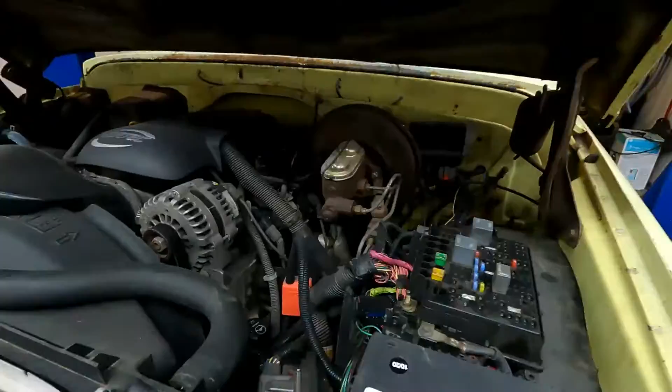Today we're talking LS swaps and what to do with all these wires. So stick around.

When we left off on the last video, I said we were going to start the wiring on it. So that's what we're going to get into today. There's a couple ways of doing it. On this pickup, this is Emily's shop truck, and we did this one the easy way. We had the original fuse box from it. So doing it this way, it was just a matter of connecting 3 wires, I believe, to it, and hooking it up to the battery and making sure all the grounds were there, and it fires right up and runs.

But most engines don't come with this. So, and this is extremely ugly. We're gonna fix this someday. But when we did this truck, we were in a big hurry, so it only took us maybe 2 or 3 hours to LS swap this baby. Yeah, so you can tell that we were in a little bit of a hurry.

Her radiator is zip tied, like she's mentioned before. That's fine, that's a complaint that I hear about commonly. You always carry a spare. Yeah, a spare zip ties.

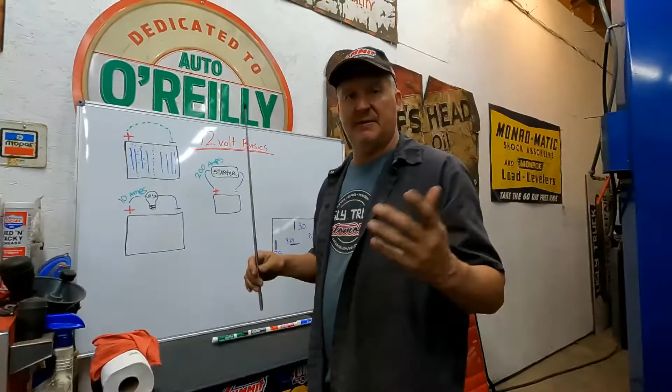So I'm going to bore you a little bit. I'm going to just go over a little bit of the 12-volt system that goes on in a regular car. Emily drew this so you could actually read it and see what each thing is. But this is a battery, okay? Say this is a battery. You got your positive side and you got your negative side on a battery. Well, that battery's got some plates inside of it that have half of it positive charged and the other half negatively charged, okay?

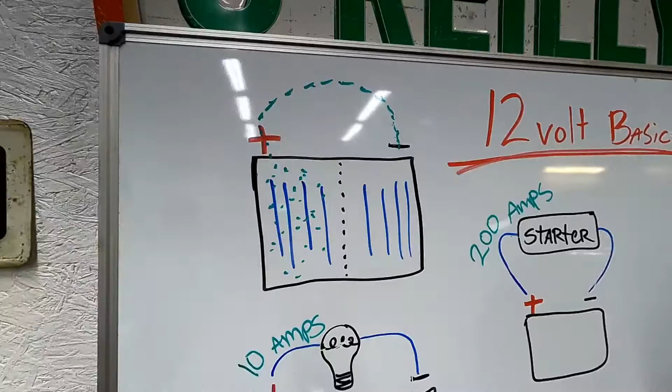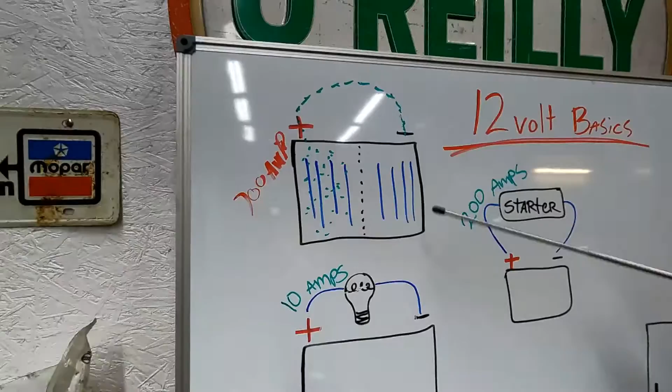Say this battery is capable of putting out 700 amps. So that's its max, okay, that it could do. So all the positive electrons that are on these plates, all those electrons want to do is get to negative. They're going to do everything they can possibly do to get to negative. So if I took a small wire and I went from positive to negative, it's going to do its best to pass 700 amps of power through that.

And an amp is just the same as like a garden hose. If you turn a garden hose on and you put your finger over the end of it, the pressure that's behind your finger, making it squirt out the way it does, that's the amperage of it. So if you had 700 amps, for instance, and it was a garden hose, you'd never be able to hold that with your finger. It's going to blast past your finger, no problem. That's what you're doing, so that's where the wire is not going to handle that.

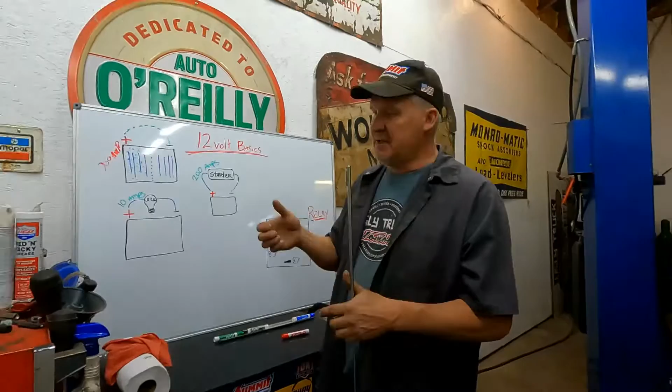It's going to melt, okay. So any kind of amperage that you're going to introduce to a wire, the wire has got to be able to handle that load, okay. So if you were going to do that mechanically, you know, you would have to have something that could really hold on to that pressure that water has got behind it. So that's amperage.

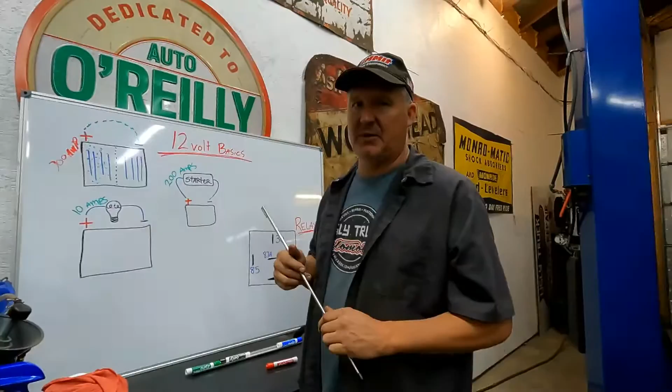It's just pressure, basically. It's not pressure, but if you think of it like that, that's what it is. And that's also current. If you talk about current, that's what I think of as current. It's current and amperage flowing. And that's all that the positive side of a battery is trying to do. It just wants to flow. So, for instance, a light bulb, okay, it has a filament in it that has resistance.

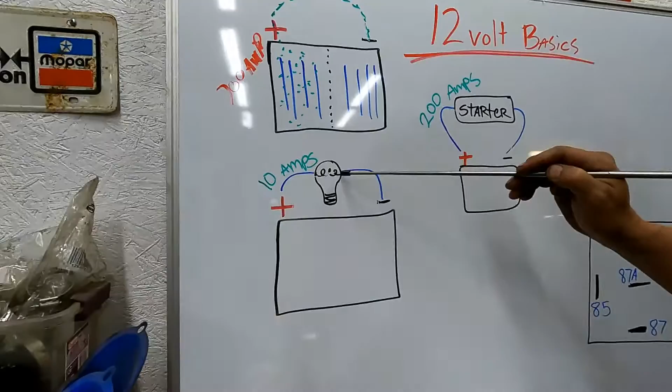So whatever kind of amperage it takes is going to pass through there, and as it passes through that filament, it's going to heat it up and it glows, and that's your light. But it's still just doing the best that it can to pass through that resistance that's in there and get to ground.

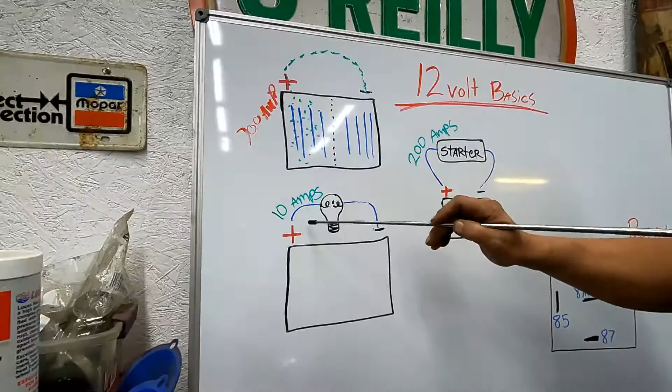So when you're talking about a current, nothing is done, nothing moves, until it actually gets to that. There has to be a path. It doesn't matter what interrupts that path. You can put a switch in it right there with an open. So a switch is going to be an open circuit, and there's going to be no current flowing until you get that to hit the ground, because that's all it wants to do.

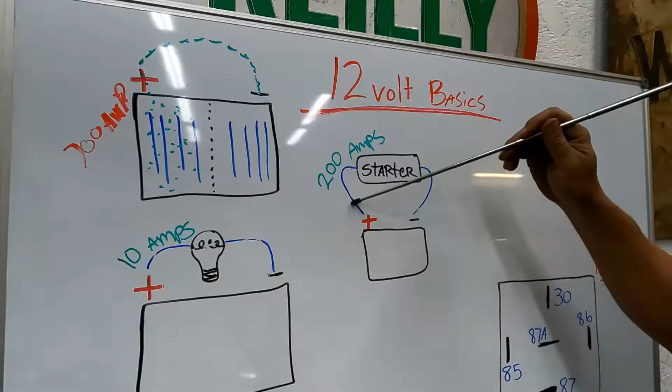So say for instance a starter. On this pickup, we would have like a number 2 or number 4 gauge wires that go down to the starter, because that thing's going to take 200 to 300 amps to start that motor. The starter solenoid doesn't, it might take 10 to 20 amps, and we're going to get into that. But you would notice that the wires that go down to the starter, they're nice and big wires, because they're carrying a giant load. If you ran this wire down to a starter and you went and hit the starter, this wire would burn and melt basically the minute you touched it, because it can't handle that kind of load.

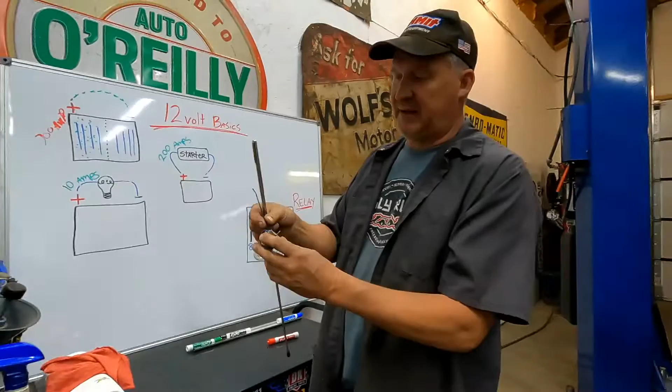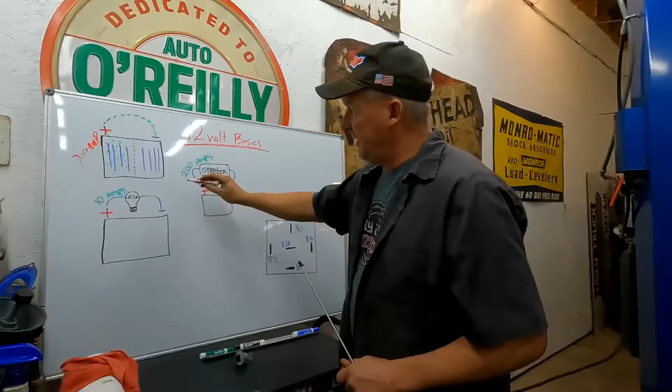So that's how a 12-volt system works. That's all you got to remember, is that the positive is trying to get to the negative. No matter how it has to get there, that's what it wants to do. So in all this is where relays come in.

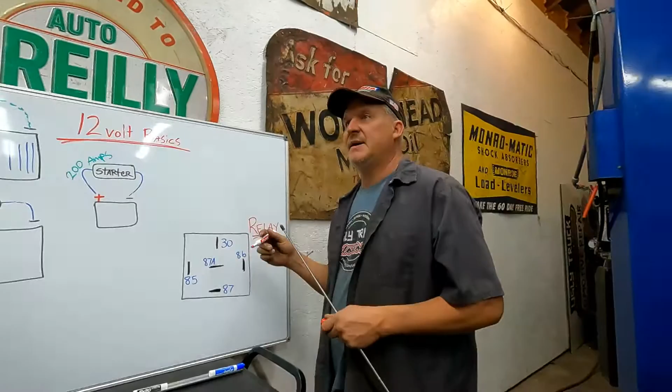Now, on this video we're talking about an LS swap. In 1985, this truck only had one relay in it, or two relays. It had a high blower relay and a horn relay, and those are two things that really took a lot of load. A long time ago, back in the 90s, they figured out that they could use relays to fire up some of these high amperage things, and you didn't have to have a giant ignition switch with giant wires going to it.

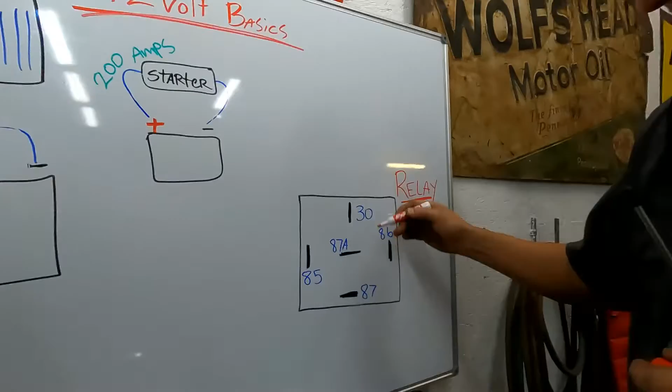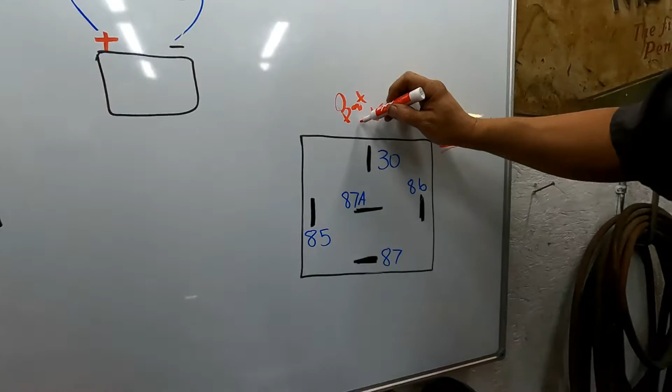Not a lot of amperage and wires coming into the actual vehicle, so they use a relay as a switch. So for instance, this relay, we'll do battery voltage here, battery plus. So you've got battery voltage going to terminal number 30, and this is going to have a nice, say a 12 volt or a 12 gauge wire going to it.

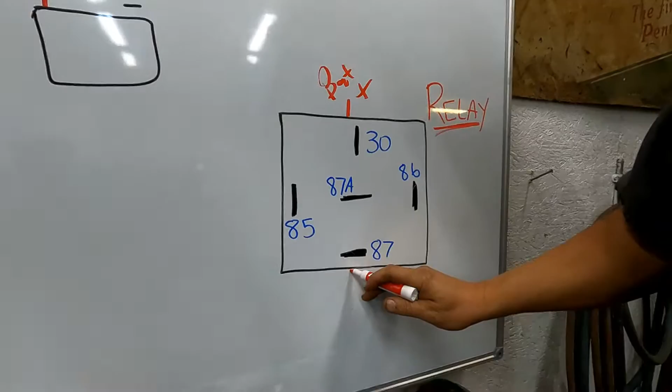Because what this is going to power up is going to be something that's got a pretty good load on it, like the starter solenoid. The starter solenoid takes a pretty good amount of amperage to fire that baby up. So let's say we're going to fire that starter solenoid up. Well, pin number 87 is going to be the one that goes to that.

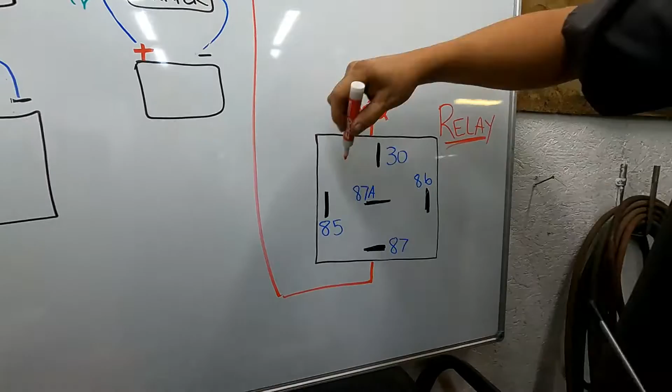So we've got a switch here. 87 and 30 right now, they're not connected, but in order to make these things connected, you've got pin 85 and 86. And if we put pin 86 to ground, and if we put battery voltage to this...

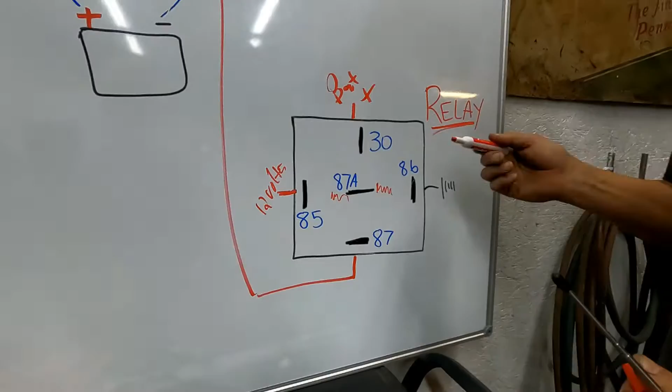It's going to send current through a little coil. So you're going to pass 12 volts through a little coil here, and it ends up making 30 and 87 contact each other. So there's your path, and it's going to engage that starter solenoid and make the starter crank over.

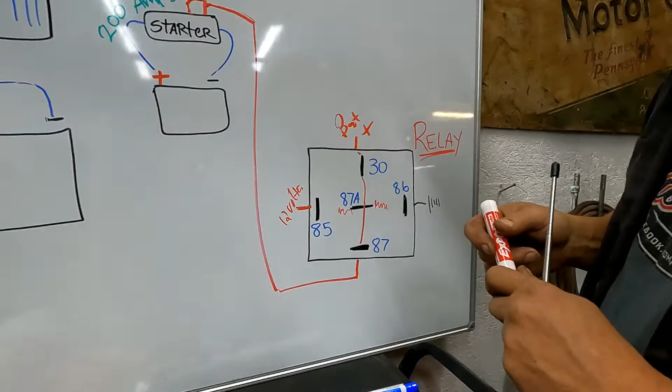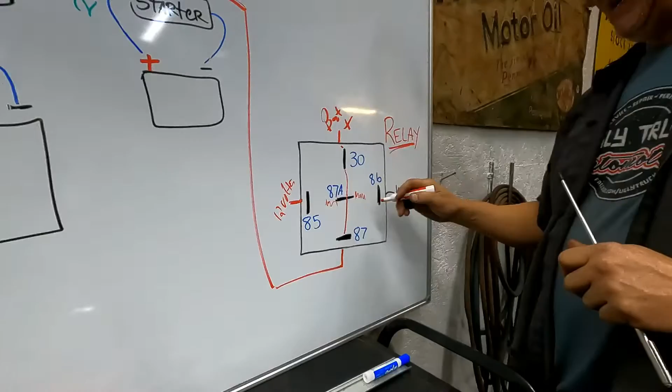The starter's already got a big giant battery cable going to it, so that's how it gets its 200 to 300 amp capable wires going to it, and a giant ground. The engine's a giant ground for it, but that's how a relay works.

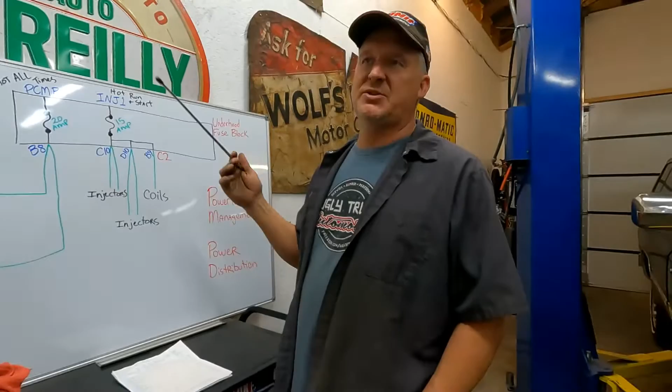Okay, so for this application, we've got a 2005 Suburban that we took the engine, computer, and all the wiring out of, and we're putting it in an 85 Chevy C10. Every one of these is going to be different unless you have the exact same instance. If it's a 2004, 2003, whatever, different engine size, it's going to be different.

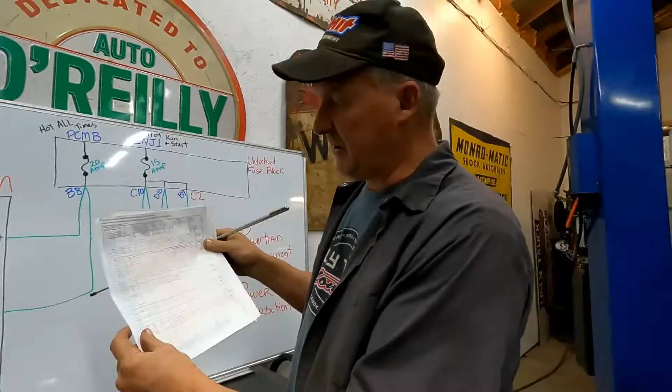So the thing you've got to do is learn how to read a wiring diagram. For this 2005 Suburban, you need to get a Powertrain Management wiring diagram. This is just the first page, and there are 5 other pages. We use ALLDATA, and on this wiring diagram, all the fuses are going to be along this top row.

We kind of did an example here, but you go across that top row and look at every fuse that's coming up, and you have to determine, hey, is this something I want to power up. Then go along each single one of them and decide, okay, I definitely need this fuse, and how is it turned on, and so forth.

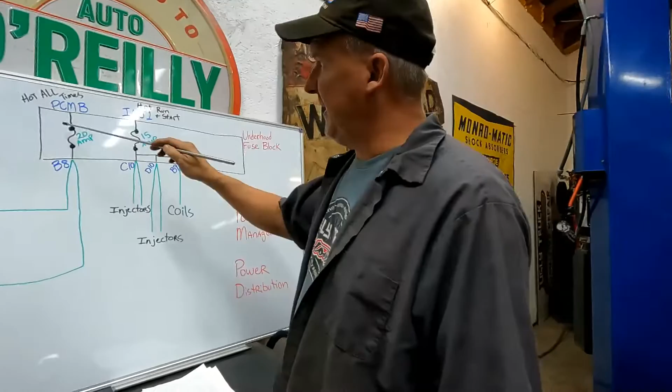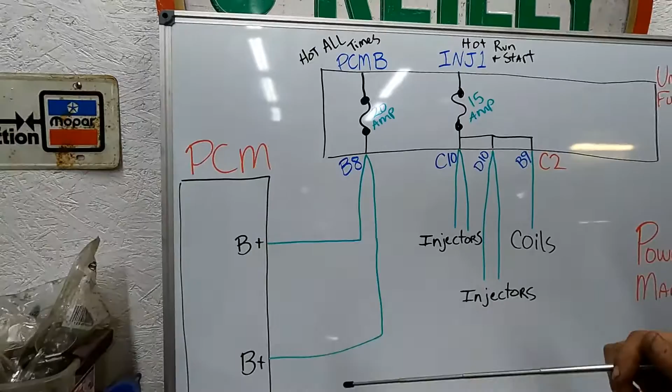So I look through each one and say, we'll work with this circuit first. I look at it and go, okay, we've got a 20 amp circuit here. It's the PCM fuse. It supplies battery voltage to the PCM all the time, whether your key's on, off, or anything. That truck has always got battery voltage going to the PCM, and that's the battery voltage that keeps it alive, keeps all the memory in it and everything.

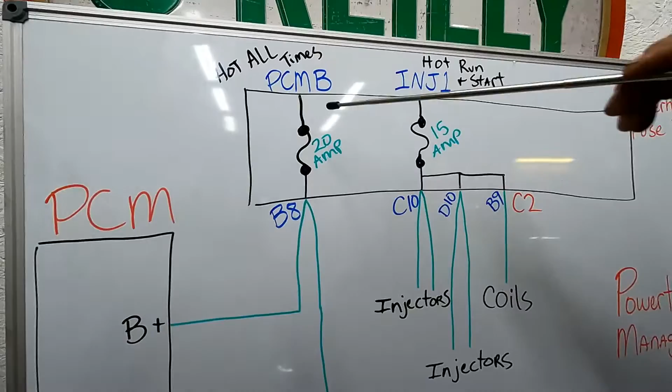So those are the 2 orange wires. They're green on our picture here, but in reality they're really 2 orange wires. When you turn that C2 connector over, it's literally only 2 orange wires, and they go to the same pin. So when I wire it up, it's going to have a 20 amp fuse going to it.

Okay, I got that done, I'm going to move on to my next one. I just knock them off the list. My next one over would be the injector 1 fuse. That injector 1 fuse takes a 15 amp fuse and it fires off 4 of the injectors, supplying power for them. It has 4 wires, and it also supplies power to 4 of the ignition coils.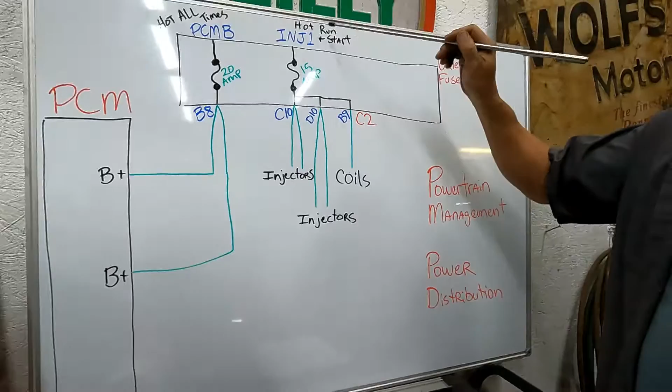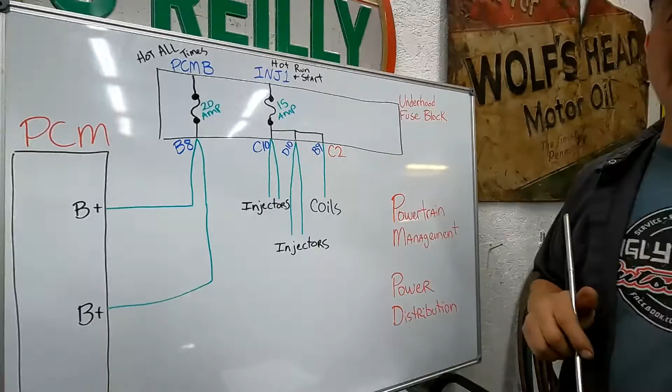And it's also going to turn on 6 other circuits. That's 1 circuit, and there are 6 more that have to be turned on to make that engine run. So that's how you do it. You start with that one, look at what it does, and that's what you have to supply power to.

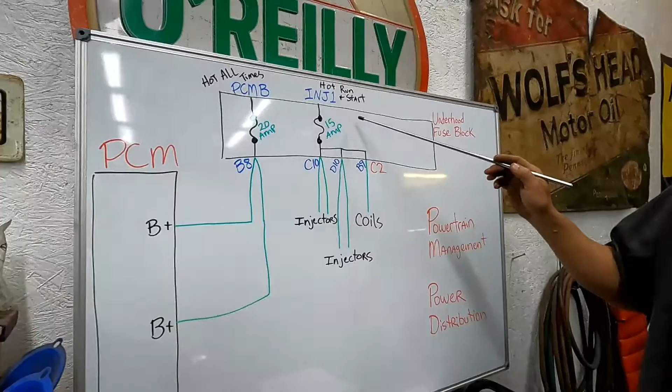So when we get into this and you see me wiring something up, wiring relays, that's what I'm doing—wiring up a relay to make this one go. And if you can see on this picture, there's 1, 2, 3, 4 more of them. So 5 circuits right there that are going to be powered up by a relay, each one powered up by that pink wire that comes out from the firewall. If you don't use a relay to do it, you're going to have big problems.

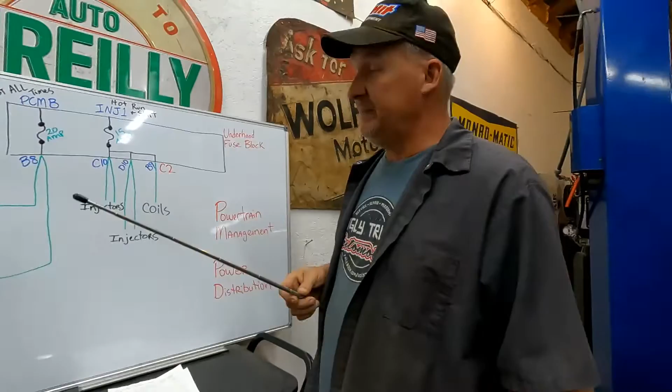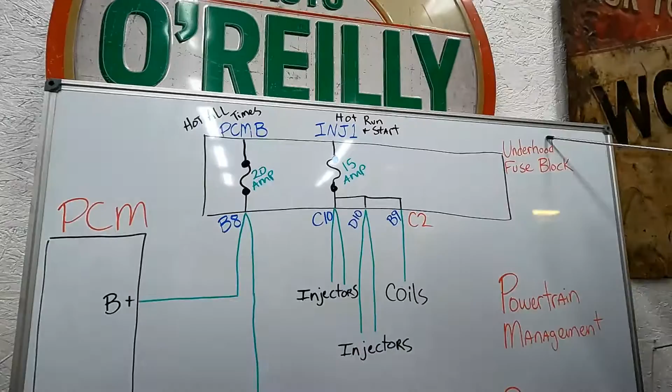I don't have the ability to run that many wires to one relay, so I'm going to use a few relays to do it. The Powertrain Management diagram just shows you your circuits that go to your PCM. You're also going to need to know your power distribution—how power gets to the PCM and all the other ones down the list, how the power gets to that.

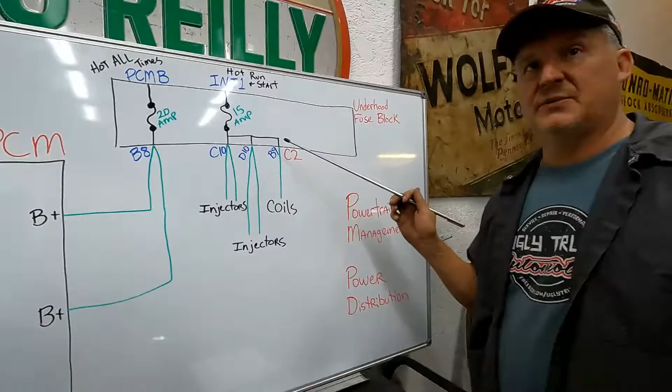So most of these, like the PCM one, goes through a 40 amp fuse right off the battery. And then the injector and all these other circuits have another 40 amp fuse that fires up all of those. And then your starter circuit, which we'll get into, has its own 40 amp fuse. So you'll have 3 40-amp fuses that'll run all the circuits in this wiring system.

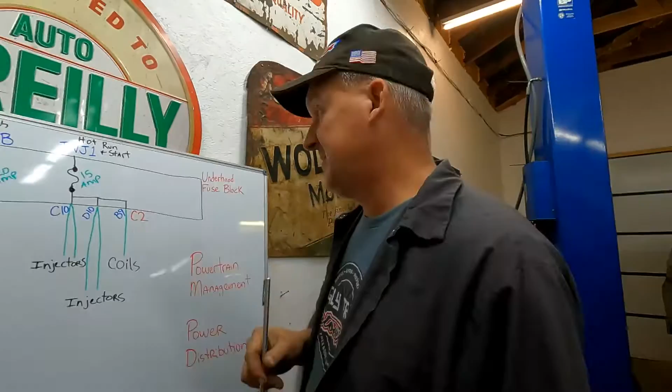So the great thing about the internet, aside from watching our YouTube videos, you can get a ton of information off of it. So you'll be able to get a wiring diagram off of this.

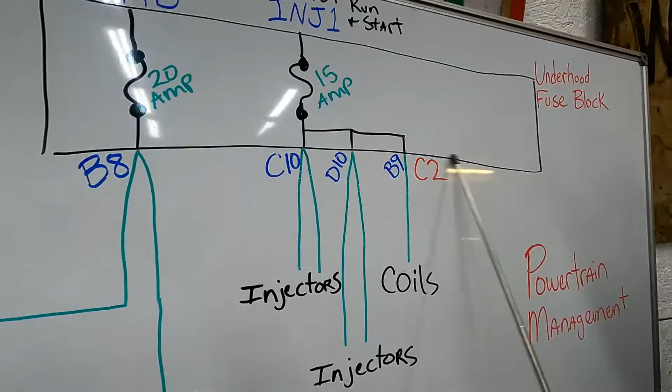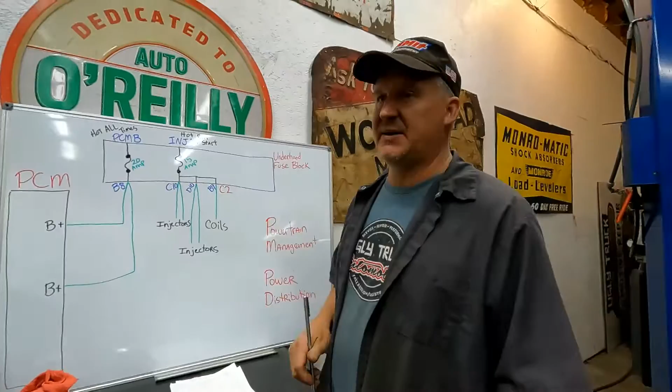It's also gonna tell you the wire, the pin number. So this one's B8, this one's C10, D10, B9. All of these are going to be pink. This one's orange. The rest of them, almost all the rest, are pink. But it's in connector number 2, which you can find out is a black connector that goes to it. But if you look at the wiring harness that you get from when it comes with the engine, there's only one wiring harness really that has a bunch of pink and orange wires in it. It's the biggest black connector that there is, and that connector supplies everything that LS engine needs. So, but it is connector 2.

When you get into wiring up other things, like we're gonna put cruise control on this truck and all the other stuff, then you have to start paying attention to what connector you're looking at. So, but just to make this truck run and drive, there's all your pin numbers, and that's your connector number, and a wiring diagram will show you that.

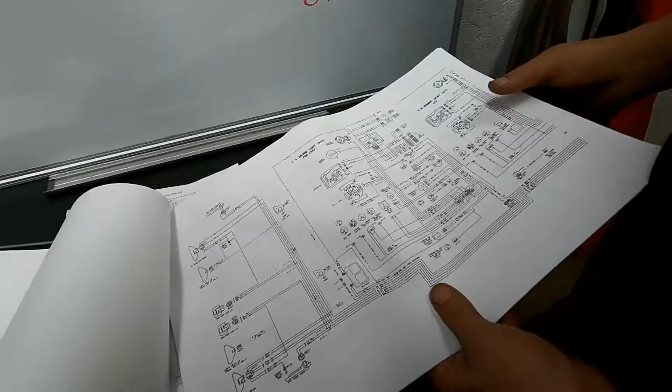Whatever you're working on, you could be putting an LS engine in anything, but like this one, we're doing an 85 Chevy. So do yourself a favor and buy yourself a wiring diagram for whatever you're working on, and they're cheap. This one was less than 15 bucks, and just by reading one, you'll learn a lot.

Sit there and just look it over and trace the wires, and that's how I learned how to read a wiring diagram. Nobody taught me how to do it. I was forced to do it. I had to figure out how to fix something, and I was forced into reading wiring diagrams. And if I can do it, you can certainly do it.

Believe me, I taught Emily how to do it. 30 minutes, and I mean, that's an accomplishment, right? It took a lot longer than 30 minutes. It was more than 30 minutes? Yeah, I think we're at like 6 years now. And I still don't get it. Okay.

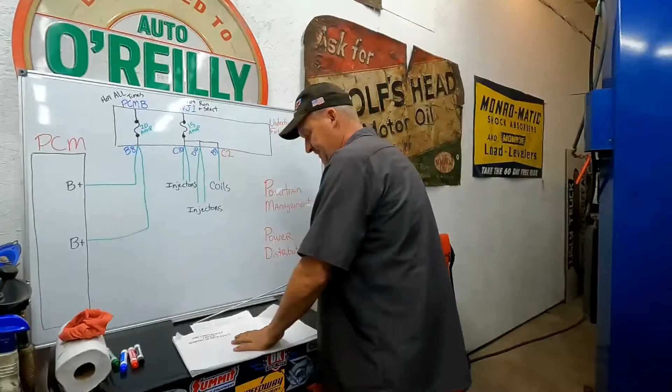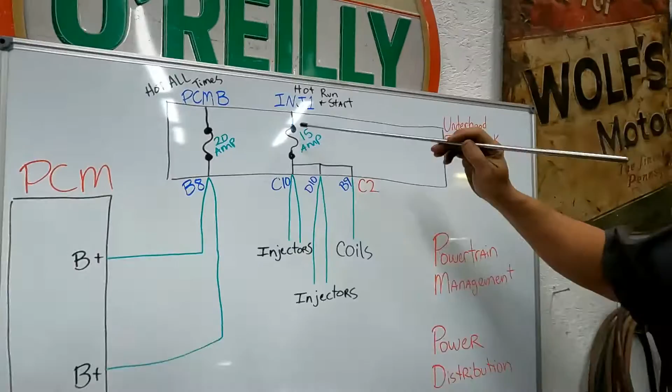So get wiring diagrams for whatever you're working on, and study them, and you will figure it out. I promise you. For the most part, all the circuits in an LS swap are going to be like this, where you just supply power to them until you get to the starting circuit, and that's where it gets a little bit more complicated. And we'll get into that too, okay?

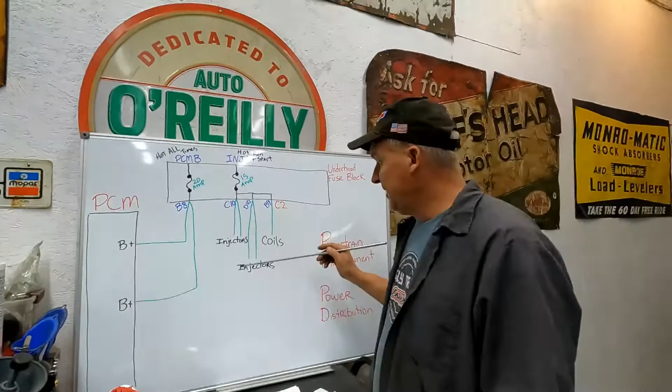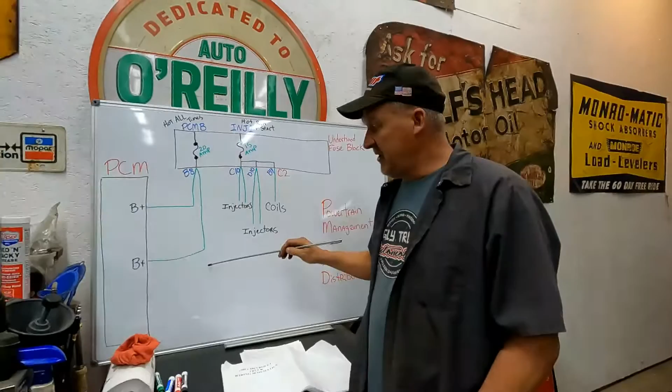This computer, a lot of times, acts as a ground, and that's all it's doing really. All the injectors and the coils on this truck, they have power fed to them, but in order to make it run, this PCM just grounds. It's the end of the circuit for it. So that's how it fires off injectors, and that's how it fires off ignition coils. It does kind of the same thing with a starting circuit too. So you have to understand that the PCM, a lot of times, it doesn't put out power to any of these switches. It just supplies a path to ground. So it's another reason why, when you aren't 100% sure about what you're working with, I don't start supplying power to anything unless I've really studied the wiring diagram and made sure that it's a source to ground, or else it's a source of power.

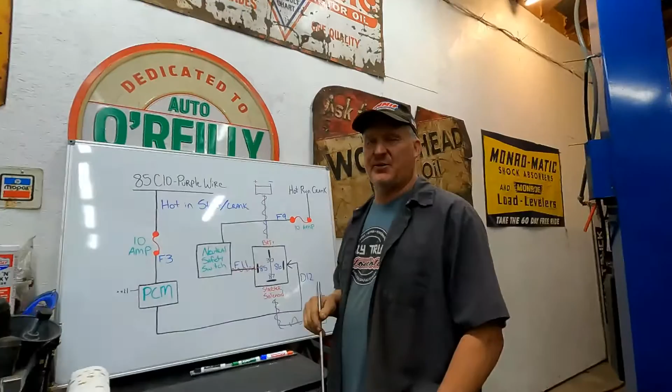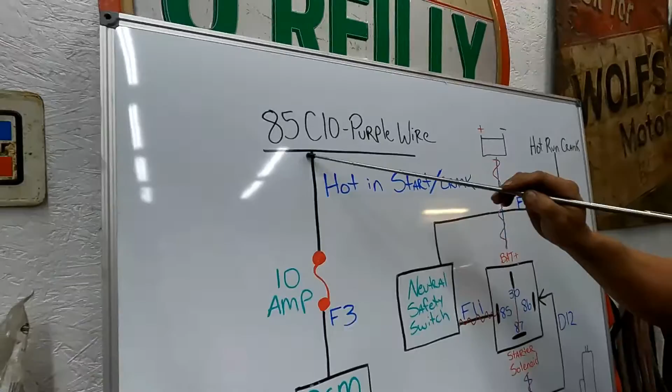Okay, one of the most complicated circuits in the whole LS swap thing is the starter circuit. When you're going from the starter, like this, we're working with an 85 C10, it's entirely different. On an 85 C10, out of the firewall, a purple wire busts out, and that purple wire just shoots off, and it goes directly to the starter. And you can tell I drew this starter, and then Emily drew everything else, because the starter looks horrible.

So, but that's how they did it. In '85, purple wire coming out, and it goes bam right to the starter solenoid.

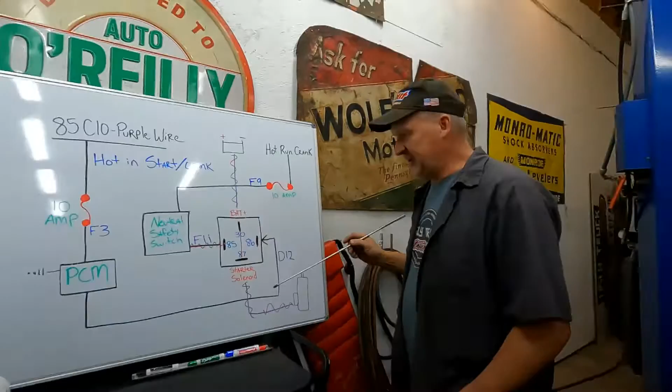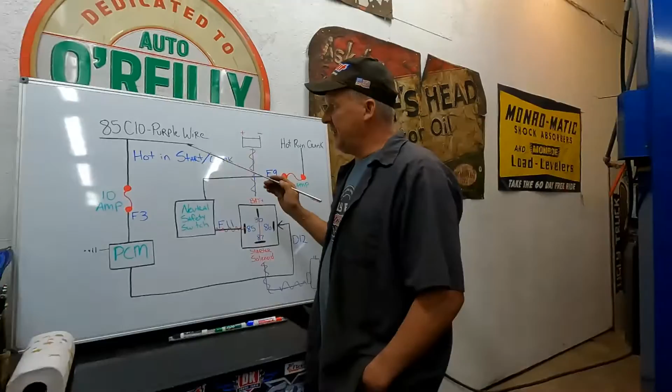Well, in 2005, they don't do that. You don't have a neutral safety switch on the steering column anymore that tells the computer it's in park or neutral. So the way they do it now, they use a relay to crank the starter over.

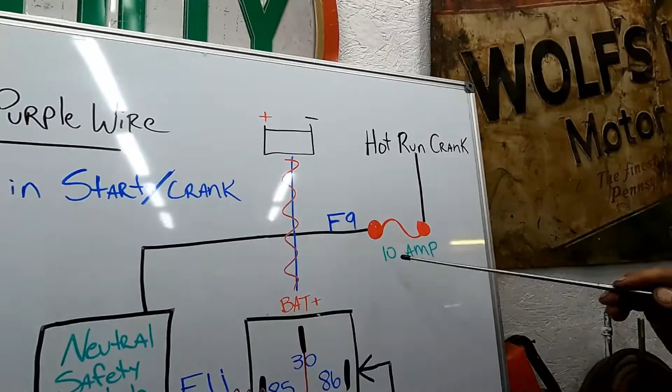And the way they do it is you go into your wiring diagram, and you'll find a 10 amp fuse that's hot in running and crank, and it goes to F9 on the connector, the C2 connector. So we can find that F9 wire in the C2 connector, and it runs through the wire loom, goes down to the transmission, and passes through the neutral safety switch, or the park reverse neutral drive switch.

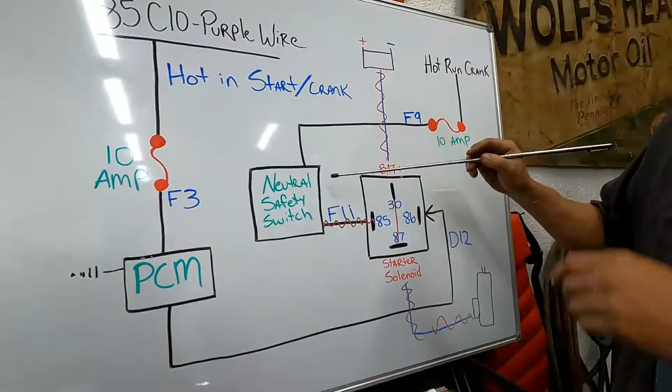So this thing, if it's in park or if it's in neutral, this switch will be closed, and it'll supply power to the number 85 pin on the relay. This is a starter relay, and then we've got pin 86 that goes to the PCM.

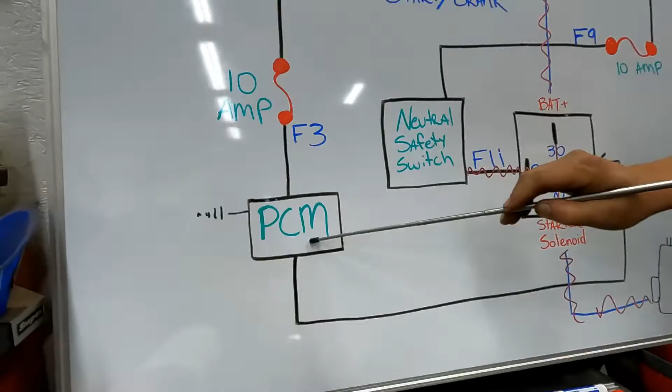You turn your key to the crank position, it passes through a fuse, and sends a 12-volt signal to the powertrain control module. And when the powertrain control module says okay, it's time to crank this baby over, it grounds that system out.

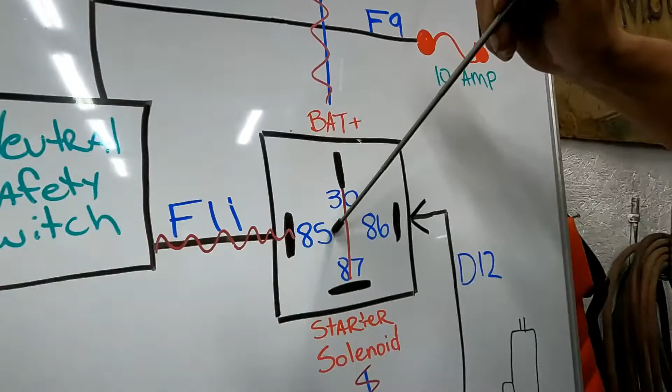So all of this passes through there, and when it grounds that out, it'll energize the coil that's between pin 85 and 86 on that relay, and 30 and 87 are going to make their connection. That's what makes your starter crank over.

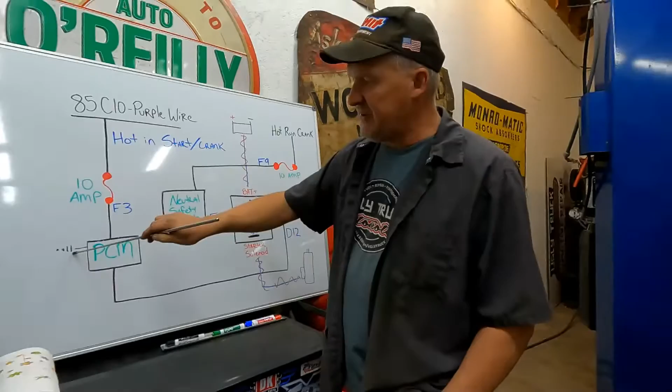So for what we've been doing up to that point, it's kind of a strange circuit, because to make this happen, it's grounding that out. The other ones, you just don't know that's happening, like the fuel injectors and ignition coils, it's doing the same thing. All the other circuits we've done, we're supplying power to them, and the PCM is just grounding it.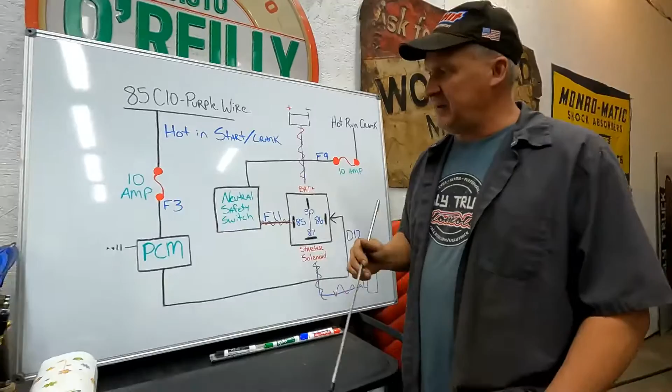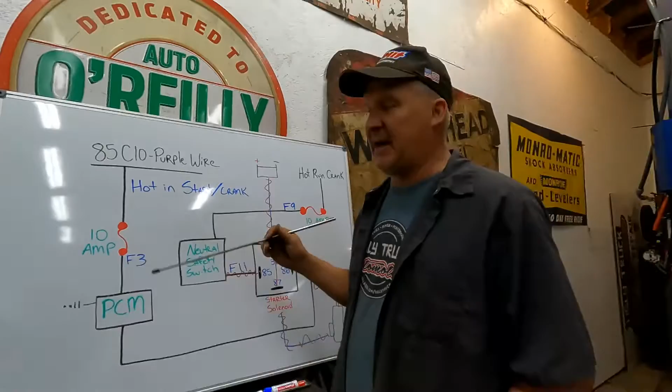But when you go to wire the purple wire up out of your firewall, you think it doesn't make much sense to do that and go into the PCM. But without this portion, it's not going to work, because you've got to have that relay that turns that on. And when you do that, this purple wire that comes out of the firewall is supplying very, very low amperage to the computer, to tell it to turn that thing over.

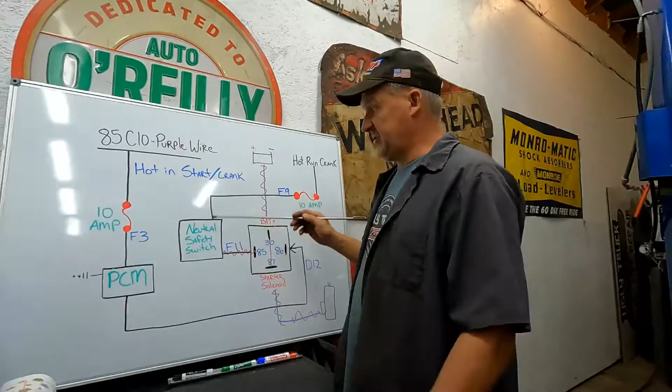And that's why they do that. They don't want a high amperage load going to your starter. It's a long length of wire, and it's just a better way to do it. Plus it makes it a lot simpler when it comes to the neutral safety switch. So it saves a bunch of wire, it saves a bunch of amperage, the amount of power that has to go into the truck and then come back out of it.

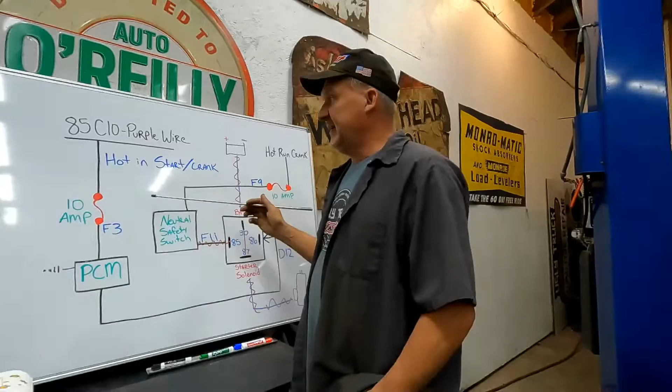So you don't have an ignition switch getting 15 amps drawn off of it, and eventually it'll burn out. If they had done this way back in 1985, a person would probably never have had to replace their ignition switch. It just wouldn't ever have had that kind of load put on it. So that's why relays are so great. Everything taking any kind of serious amperage and load is being done by that relay and nothing else.

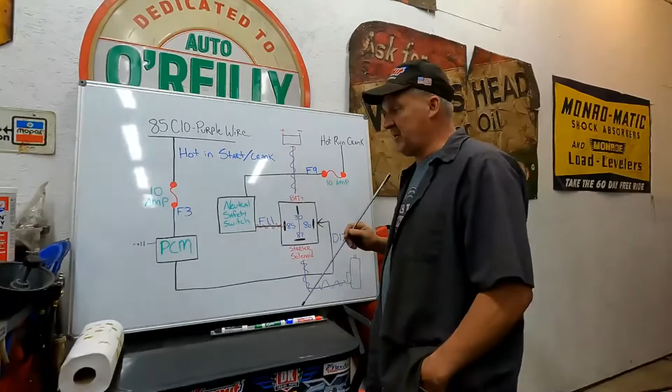But when you go to wire this up, you have to find this circuit, and without that whole circuit, it's not going to work quite right. So that's the one circuit that stumps people the most on an LS, I think, just because it's kind of complicated.

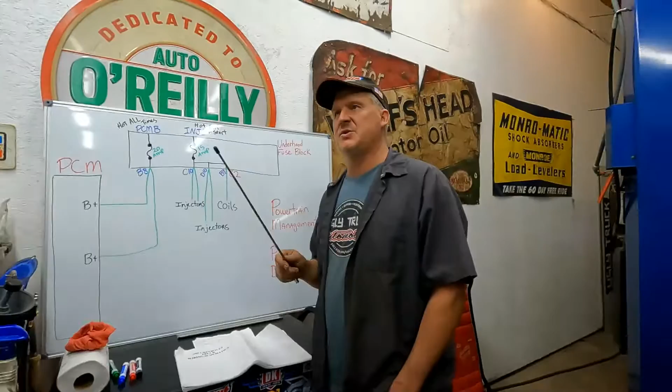Okay, the other circuit that's kind of difficult - not really, it's more difficult in this one because we've got two fuel pumps. But the fuel pump relay circuit, the PCM turns that fuel pump on for a couple seconds when you turn the key into the run position.

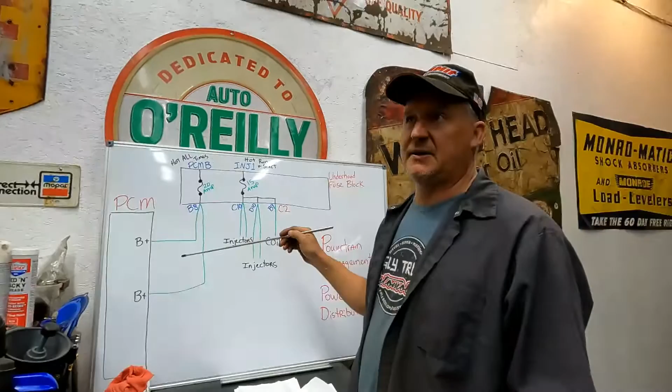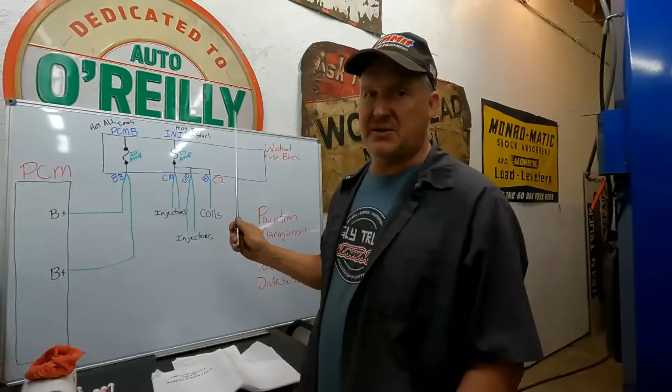So you turn the key into the run position. PCM sees that you're about to start this thing. It fires up the fuel pumps for a couple seconds, but it's also designed so if anything happens and the truck's not running, it shuts the fuel supply off, or the electrical supply off to the fuel pump. That's the other reason for using relays the way the PCM does it, because you don't want a fuel pump that runs all the time with your key on. You want it turned on only by the PCM, and if something happens, it shuts off. So that's another circuit that's kind of tricky, but we'll show you that one too.

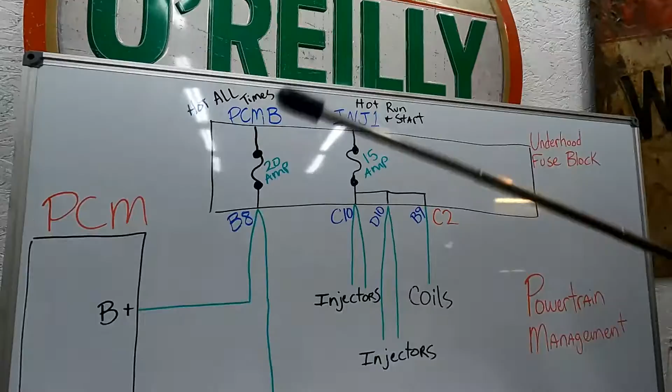So again, want to step up to the whiteboard? Sure. Huh? Oh no, step back, please. Step back. Am I in the frame?

Yes. So that's why it's very important to have a wiring diagram for what your engine and transmission came out of, and what it's going into. Every one of them is going to be different.

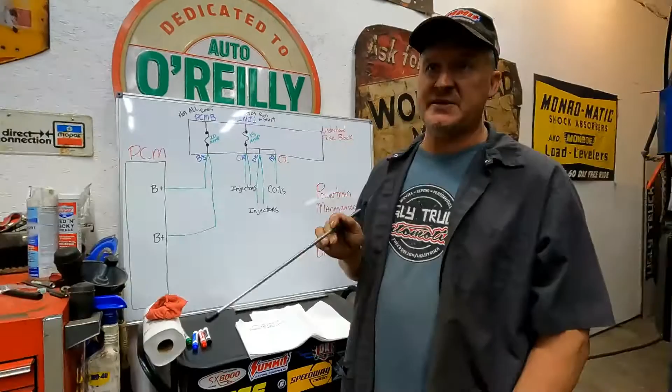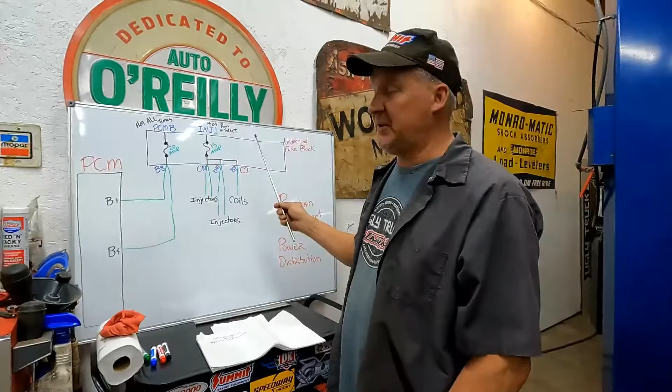Like this one's got electronic throttle control. We've got one coming up that's cable operated, so it doesn't have electronic throttle control. So this whole strip of wiring going to it is going to look pretty much the same, but I'll get down to a certain point where it has the feed for the throttle control, and there's not going to be a wire there. That's why it doesn't do any good to do an exact follow-along video, because it's going to be different. And the odds that you're working on an 85 C10 are probably pretty slim. But...

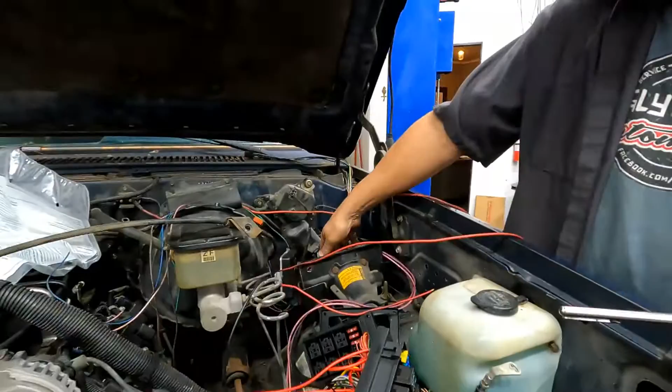If you are doing an older Chevy, the wires that go to the ignition and down to the starter were always pink and purple, okay? And any wire that went into the fuse box that was red always had battery voltage. So that was pretty nice. But I don't know, maybe you're putting an LS in a Jaguar or something like that. I don't know. But they all work pretty much the same, so you just have to figure that out and make sure you're using the right wires.

Okay, and use relays. Relays are your friend. Yes, that's what I always say. I only have two or three friends, but I have 400 or 500 relay friends. That's so sweet, I'm so happy for you. I know, and every day my friend list grows as I keep doing this. So tomorrow I'll probably have 405 relay friends. Yeah, makes me feel nice. Mm-hmm, yeah, mm-hmm, they never call. Yeah, but they keep running. Should have named the dog Relay.

It's very helpful. Oh, you know another great thing relays are for? Cooling fans. Yeah, and this truck has cooling fans, so we have to add some relays for that too. Cooling fans take a huge amount of power. So power's good, as long as it runs through a relay. What do you think?